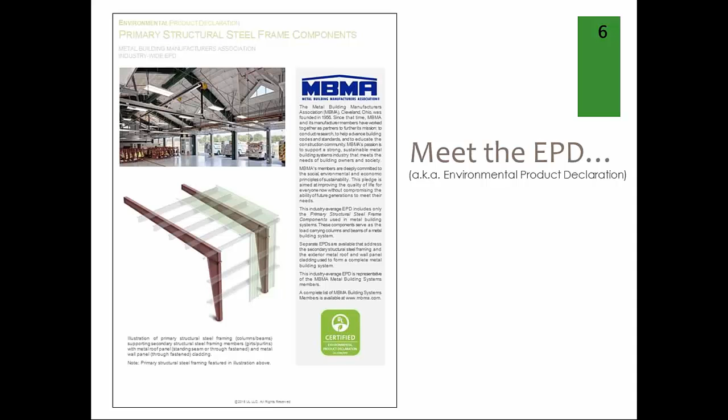So what are some of the market forces driving the demand for green in today's marketplace? There's a global green building market, and it grew from 2013 to approximately $260 billion, including 20% of all new U.S. commercial real estate construction. Commercial building owners are expected to invest $960 billion globally through 2023 on green existing built infrastructure. When surveyed, 63% of construction firms had new green commercial projects planned between 2013 and 2015, and around 71% of U.S. project specs reference LEED credits.

And clients are also driving the demand for green. 70% of consumers are consciously searching for greener products. New consumers consider the entire life cycle of a product and how their actions are creating not just near-term impacts, but ripple effects that will last today, tomorrow, next year, and a legacy for generations to come. So we have to think beyond the immediate needs to the impact on future generations and users. They're more concerned with what's contained in the product, how much electricity it will consume, how long it will last. And EPDs provide the quantified environmental data based on LCA and ISO 14025 that consumers can use to identify and weigh different environmental risks themselves.

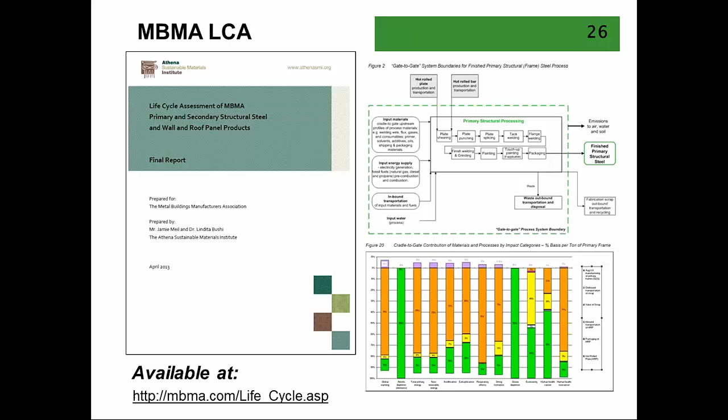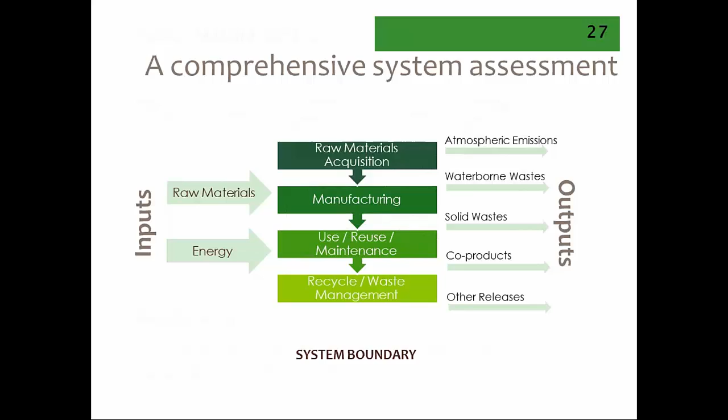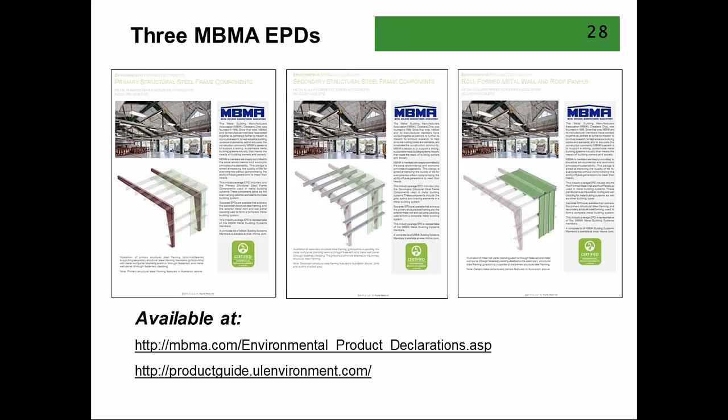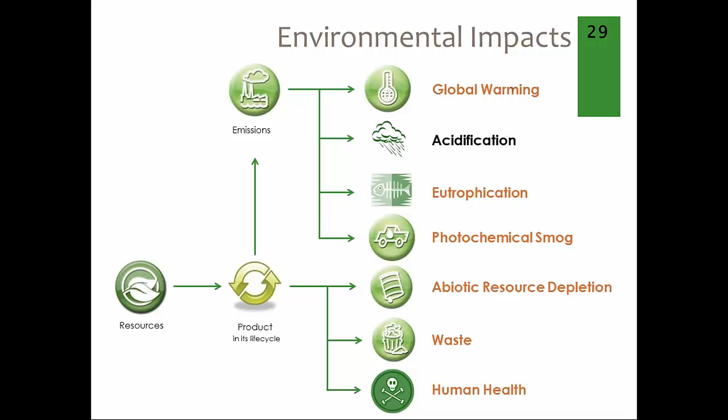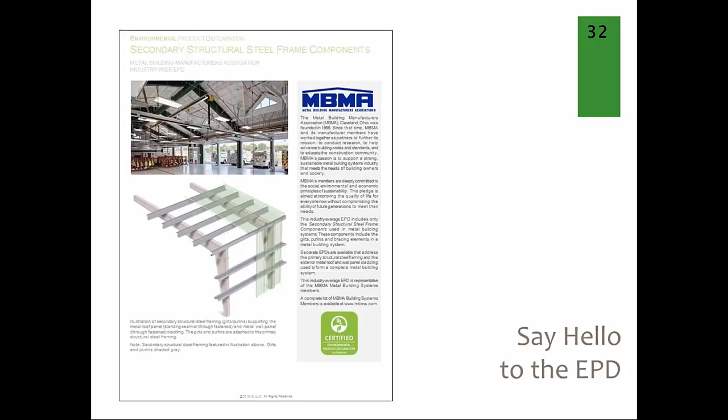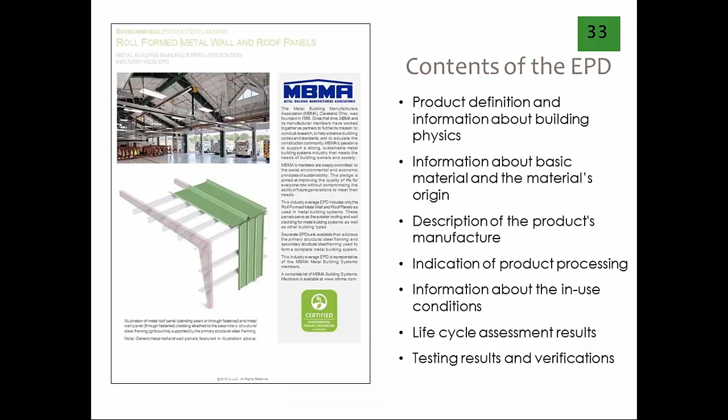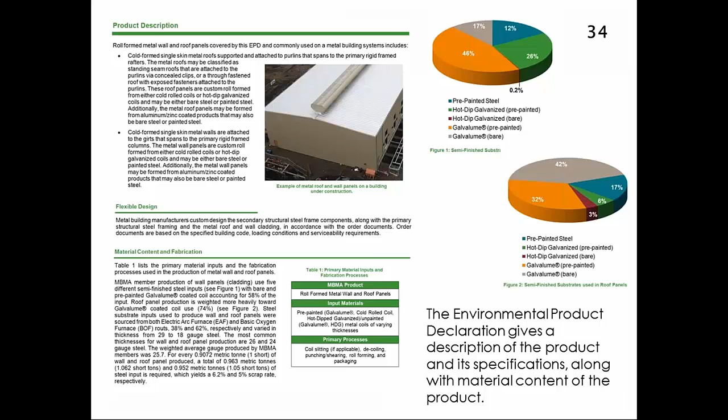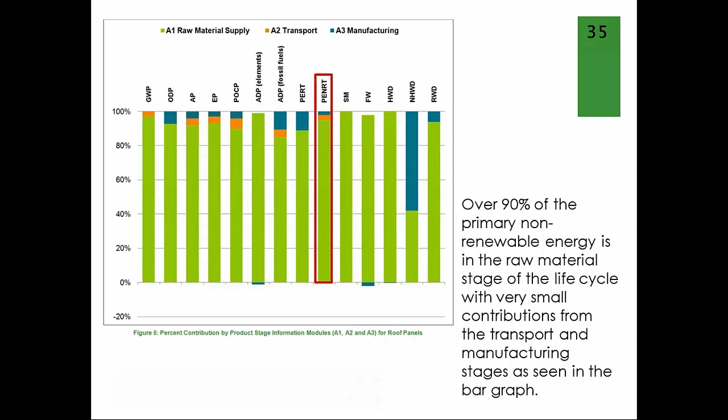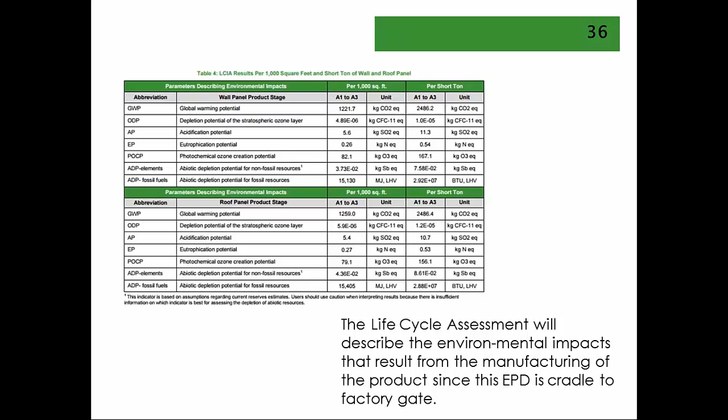Looking at one more closely, GWP is global warming potential, and this value of 1,221.7 kilograms of carbon dioxide equivalent shows the potential that this product has to contribute to the rise of global temperatures due to the emissions of greenhouse gases that occur from cradle to factory gate. And cradle means raw materials through the transport and manufacturing of the product.

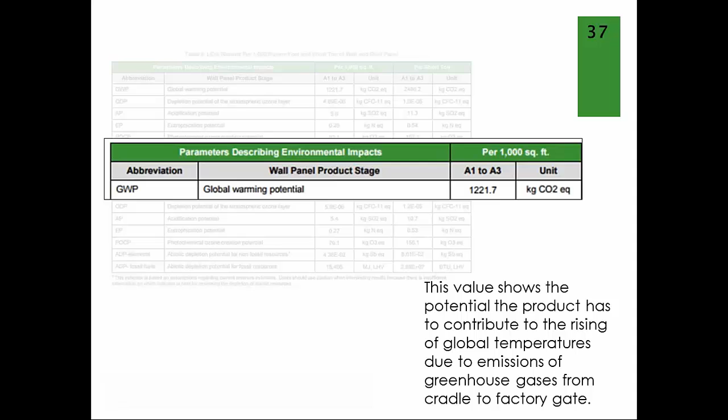Once the EPD has been created, UL Environment offers what's called an EPD Transparency Brief, which is a front and back simple market-facing deliverable that we found our clients really like, because even though an EPD is a distilled form of the LCA, they're typically between 15 to 20 pages, which still isn't a very customer-friendly way to present that you have an EPD and what the high-level impacts are.

So to summarize, EPDs are a communication tool among manufacturers, suppliers, distributors, purchasers, contractors, and users by functioning as a source of environmental information while enhancing environmental awareness and interacting with internal environmental concerns.